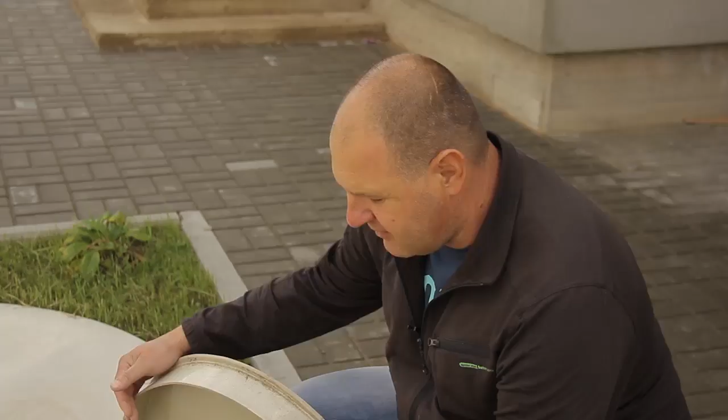The septic recycles waste and gives clean water. It's ecologically clean, and there is no smell. There's a compressor which supplies air to the septic tank, and also a timer which periodically switches the air supply on and off. We want to stick grass up here. There will be all greens, beautiful. It will not even be noticeable.

The treatment plant in Edward's house is designed for 4 people. Moreover, it consumes less energy than a refrigerator does. At the same time, wastewater can flow out of the bath and kitchen. There are no restrictions on how long and where taps can be opened in the house.

All this together creates a trend, a new generation autonomous sewer. The count of people who acquire treatment plants is growing. Living in the country has become more affordable. People don't want to live in a city. Everyone is trying to have a small but own piece of land. But it's difficult to do without utilities.

The secret of purity is simple. The treatment plant uses biological treatment, the most ecological method of recycling wastewater. The mechanical compressor does the whole work, and bacteria take part in it as well. Microorganisms eat all organic matter, leaving activated sludge behind. The output is water purified to 98% and odorless. It can be fed into the drain well, storm water drain, and even used for watering plants.

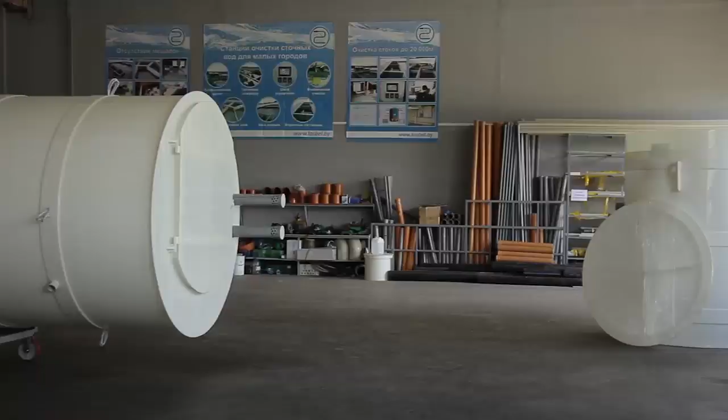Once the order arrives, the drawing is produced. Large drawings and blanks are cut with hand tools. Small workpieces of complex shape with large radius are cut here, on this 3-axis milling machine. Then everything comes to the cooking process. Body parts are made, and small parts are welded to the body. Thus, the product acquires its shape.

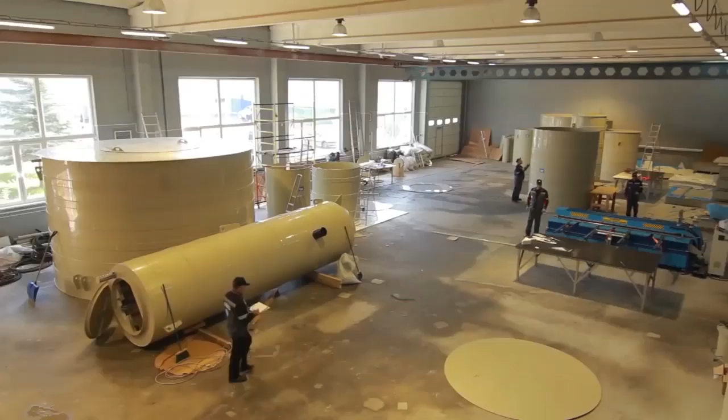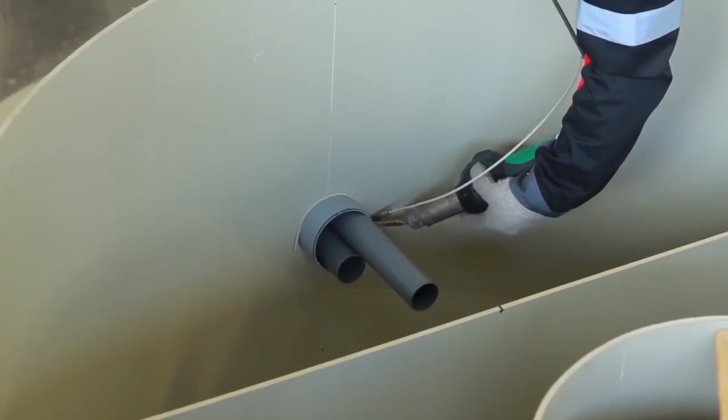If the customer needs a large volume of clean water, the buildings are grouped in several pieces.

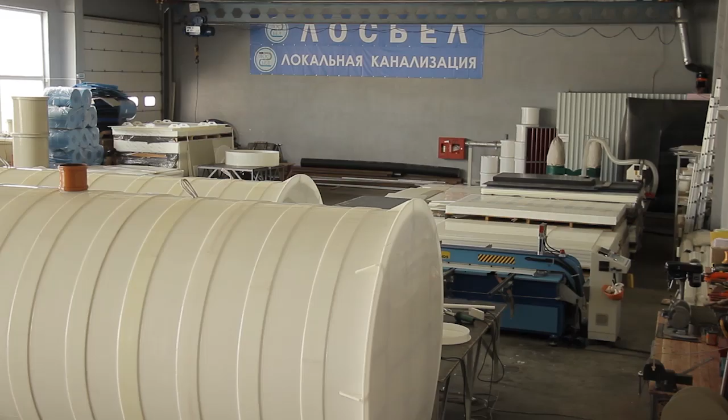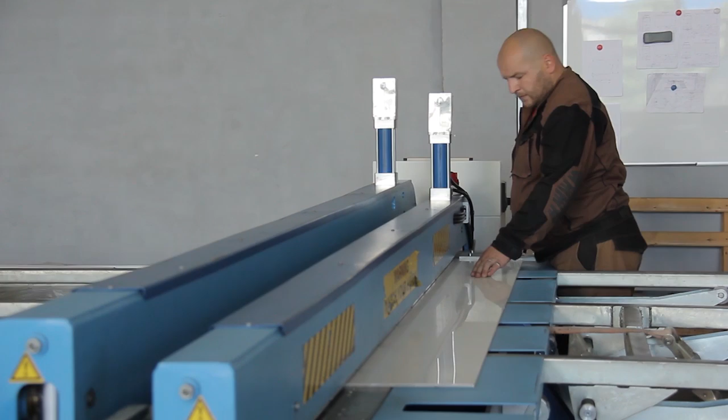The new generation machines do difficult tasks here alongside people. This is the butt welding machine. Local systems acquire an enclosure via that machine. It welds polypropylene sheets with accuracy to the millimeter. There is a certain temperature which is regulated in real time. The vacuum table, another trick of the machine, saves time on mount attachment.

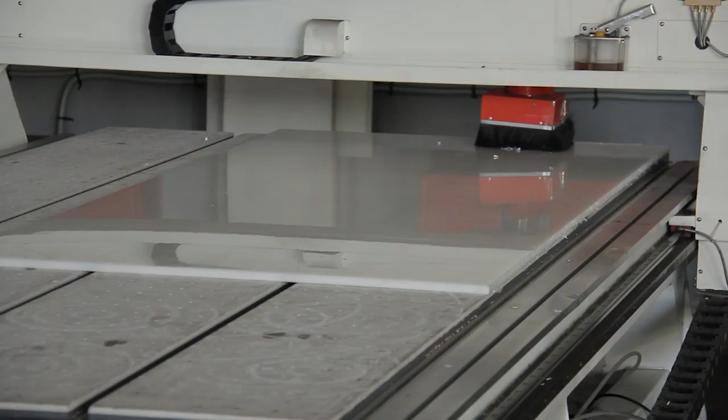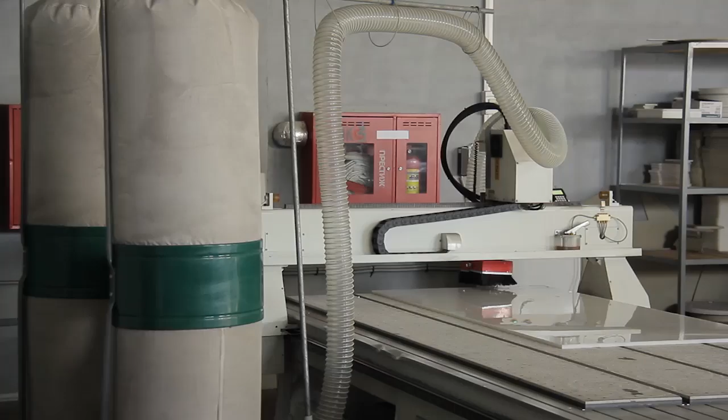In general, the equipment, as well as quality products and high-quality professionals, makes the company Losbel a leader in the market.

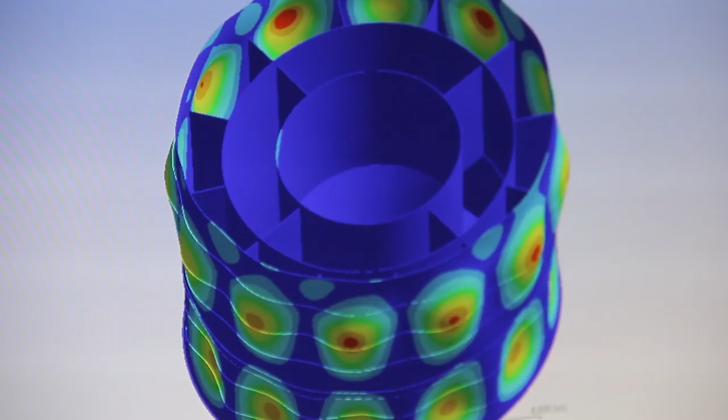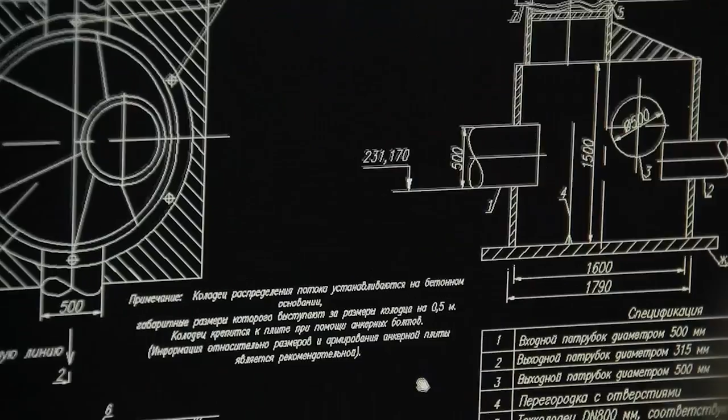Losbel, the company, has been established for 5 years within the framework of the import substitution program approved by the President of Belarus. The company deals with the whole complex of works related to industrial systems, domestic sewage and water supply systems, and takes a leading position in the market. Losbel offers customers innovative solutions and technologies. The stocks of components allow the company to manufacture products in the shortest time. The list of products includes a dozen types of treatment facilities, pumping and wastewater treatment plants for towns as well, tanks, grease traps, and constructions for dosing chemicals. The company has implemented a quality management system, ISO 9001. Losbel has its own design institute and highly qualified professionals.

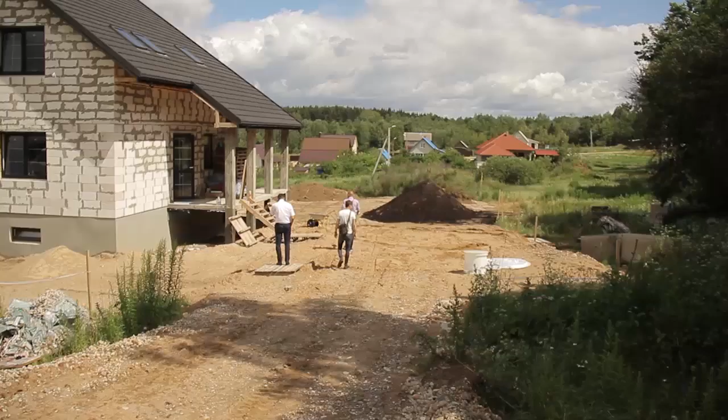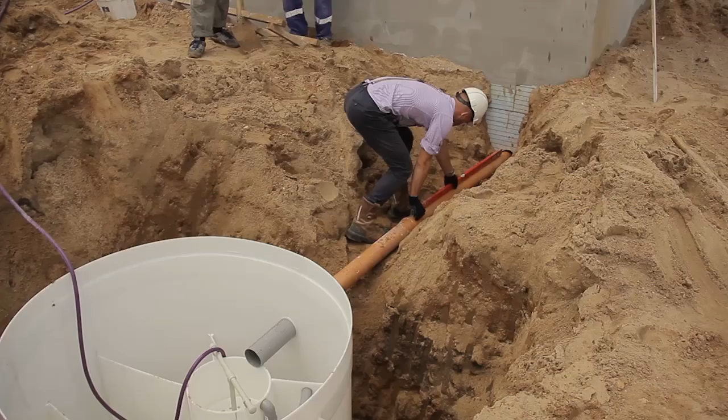The installation of treatment systems is simple. The construction for cottages assembles within one day, and just two people can deal with it. They will do the necessary preparatory work, choose the location for the plant following customers' specifications, and test the soil.

The construction must be assembled on a reinforced concrete slab. We do that in order to comply with the horizontal. That's our technology — we have a vertical hydraulic labyrinth inside.

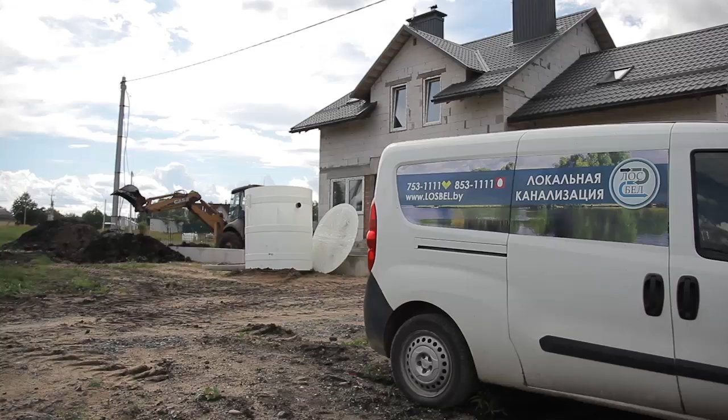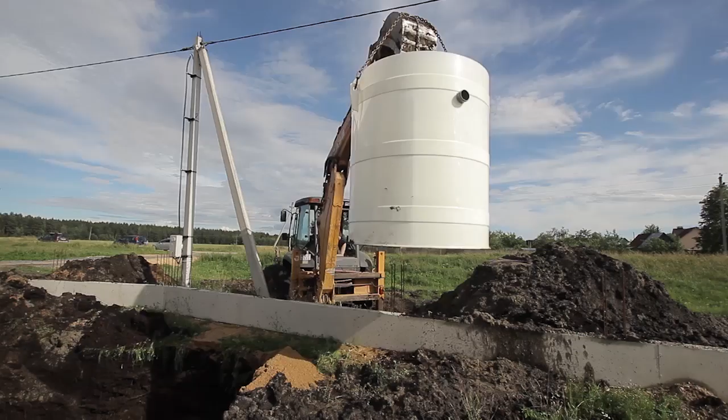Autonomous sewage treatment plants can be installed at any temperature. According to the regulations, the temperature can be up to -40 degrees. It allows you to realize a dream about an autonomous sewage system at any time of the year. Most often it's located a few meters from the house, which minimizes the risks of sewer pipe damage.

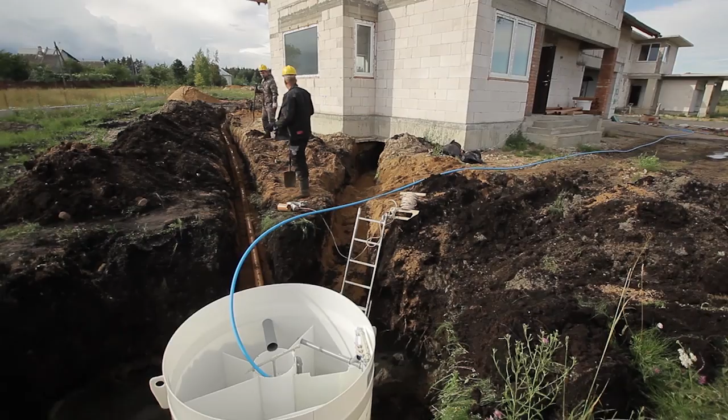This year we have 234 buildings that came from our production plant. We give a 10-year guarantee.

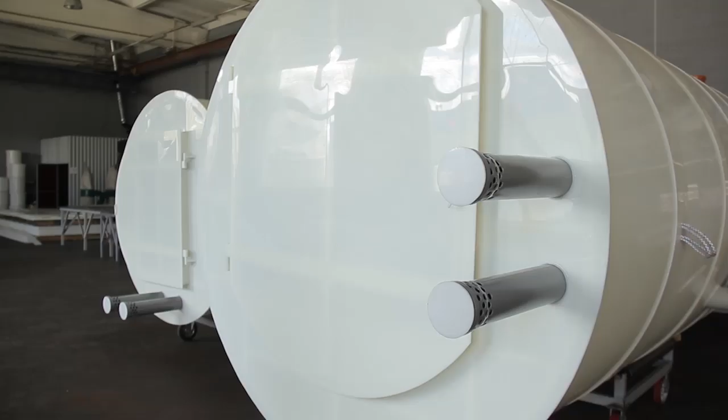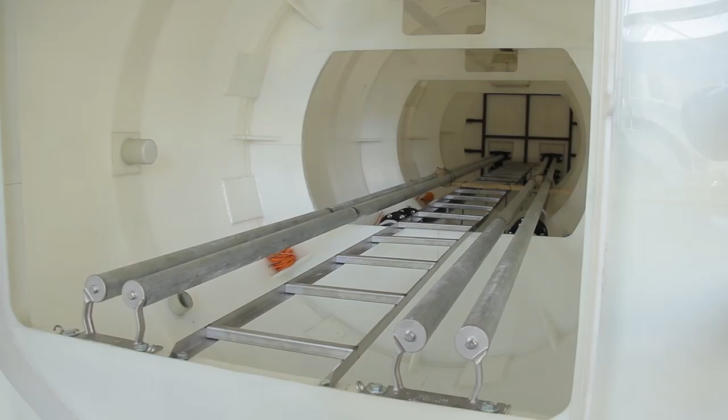Firefighting stations are constructions which extinguish fire with water and without human intervention. The water quenching method is the most secure and reliable. Also, it doesn't harm the environment.

Ecology is the sphere the government will be paying attention to in the nearest future. That's written in the Program of Country Development for the years 2016-2020. It was endorsed at the 5th All-Belarusian People's Assembly.

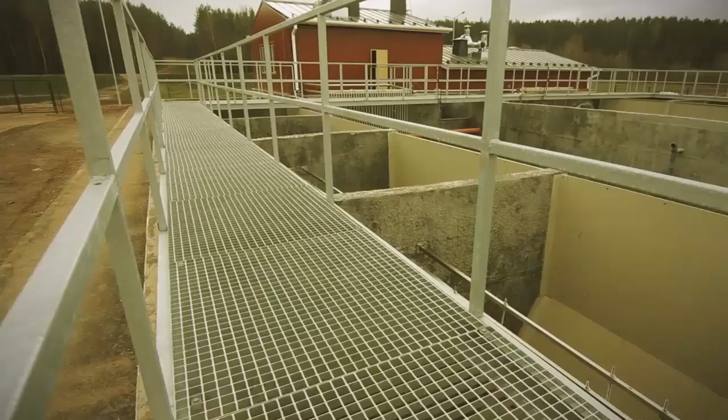The project envisages the creation of favorable conditions for human life. It introduces the mechanism of a green economy. This means that during the 5-year period in the Republic of Belarus, all conditions for the sustainable use of natural resources and reduction of anthropogenic burden on the environment will be created.

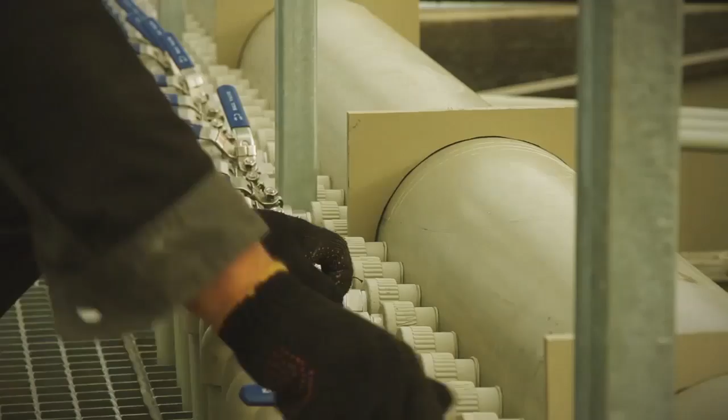Lines of rational use and protection of water resources, among other things, will include the reduction of pollutants released into water with wastewater. The country plans to introduce progressive energy- and resource-saving processes, improving the mechanism of compensation for harm caused to water.

Classic treatment plants require a lot of attention. Cesspool owners call vacuum trucks very often. Everything is easier with autonomous sewage systems.

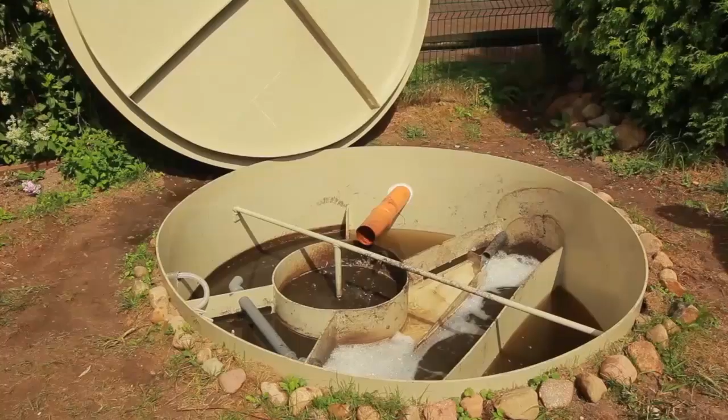Visual inspection and removal of sludge are done annually. This is handled by experts. After-sales service of large constructions is going on online, 24 hours a day.

All signals coming to the remote controller are recognized by us, and we know what's going on at this very hour and minute in a treatment plant. If there are some kind of errors, we contact the customer and send a team to respond immediately. It's good for the environment, it's good for the customer, it's good for our image.

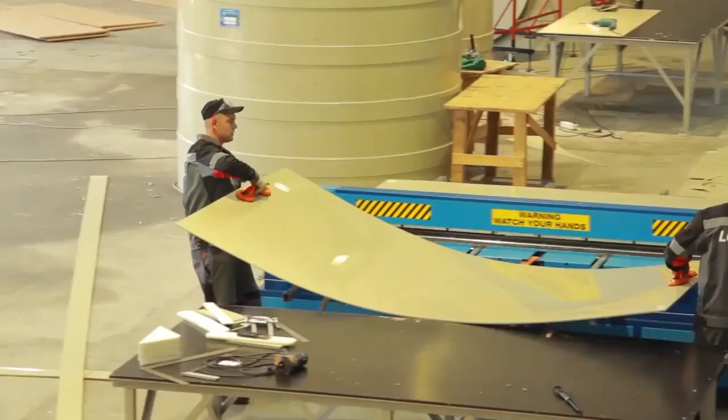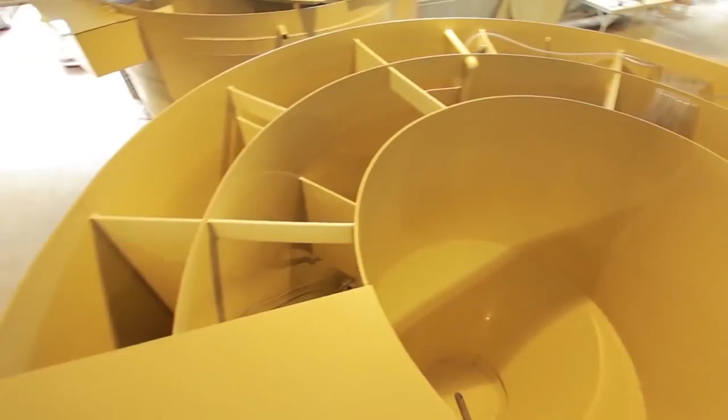To avoid that process, the company Losbel produces entire wastewater treatment systems for hotels, recreation centers, gas stations, and even entire towns with a population of 100,000 people.

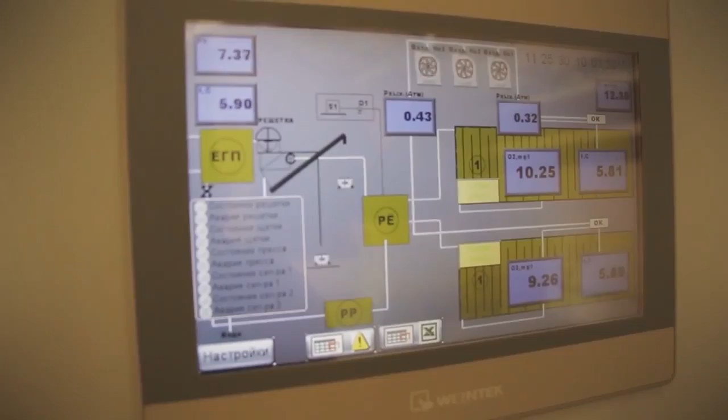Wastewater treatment and its impact on the environment is a complex problem in world practice. In our practice we use biological methods of wastewater treatment as well as physical and chemical methods. It's very popular to use biological and physicochemical treatment of wastewater at the same time.

Nowadays, biological treatment methods are used on the territory of the Republic of Belarus more than any other method. At production facilities, physical and chemical cleaning methods are used, as well as integrated approaches.

The quality of wastewater is monitored by the Ministry of Natural Resources and Environmental Protection in the course of control measures, as well as resulting in the State Analytical Control, a national environmental monitoring system.

In particular, we are measuring the quality of the main waterways and rivers, and we have some ponds that are also under anthropogenic burden resulting from the drop of treated wastewater, which are also carried out for observation.

They say the person who helps nature helps himself.

Out of a sense of respect and gratitude is born something more. It's fleeting but eternal, invisible, but it exists.

Happiness. Its power is in the unity of each of us and in unity with nature. So love it, love yourself, allow yourself to be happy.